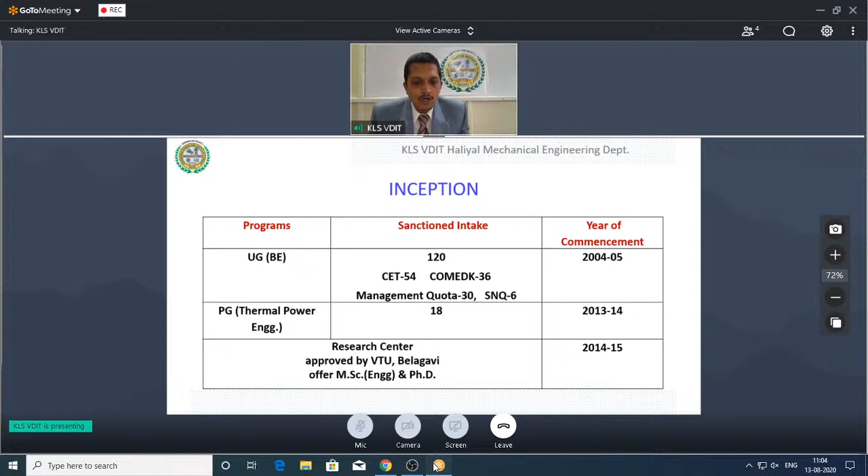Our Mechanical Engineering Department started in 2004 with an intake of 60, now it is 120. Out of this 120: CET 54, COMEDK 36, Management Quota 30, and SNQ 6. We also offer PG in Thermal Engineering with an intake of 18, started in 2013-14. Our department has a Research Center approved by VTU Belagavi, offering MSc Engineering and PhD.

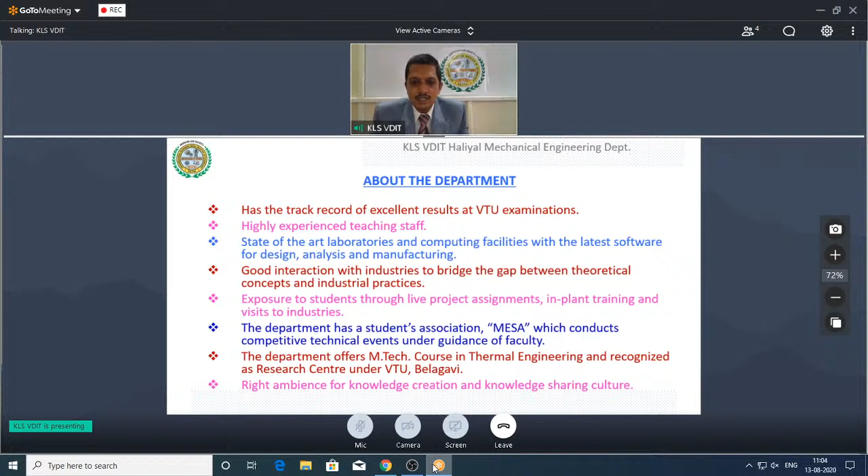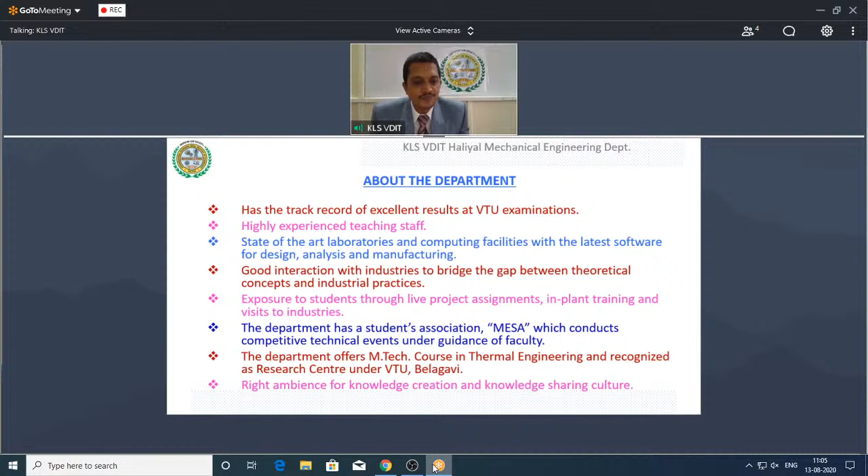Our department has a track record of excellent results at VTU examinations, highly experienced teaching staff, state-of-the-art laboratories and computing facilities with the latest software for design, analysis, and manufacturing. We have good interaction with industries to bridge the gap between theoretical concepts and industrial practices, with exposure to students through live project assignments, plant training, and industry visits. The department has a Student Association, MESA, which conducts competitive technical events under faculty guidance. We offer an MTech course in thermal engineering, recognized as a research center under VTU Belagavi, providing the right ambience for knowledge creation and sharing.

In our department there are totally 22 faculties, 2 are PhD holders, number of professors are 2, associate professors are 3, assistant professors are 17. Average age of faculty is 30 years, average teaching experience is 9.4 years, and the student-faculty ratio is 24:1.

Faculties cover all domains: thermal, design, and production. In thermal domain 36% of faculty, design 18%, and production 36%. Faculty credentials: 9% are PhD holders, 9% MTech holders, and 82% are pursuing PhD.

Journal publications in our department result from UG student project work, PG student project work, and research work. Journal publications in Scopus Indexed journals: national 45, international 65. Conference publications: national 24, international 43. Maximum citations in journals are 550, H-index 9, I10-index 9.

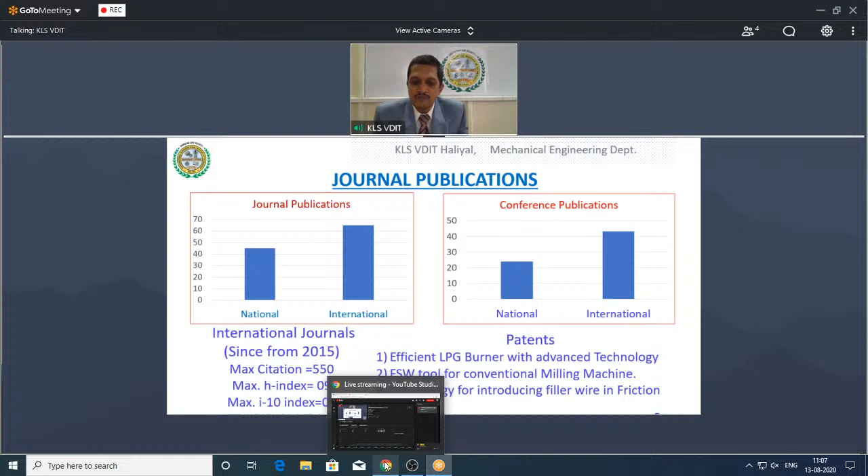Patents in our department include an efficient LPG burner, advanced technology friction stir welding tool for conventional milling machine, and technology for introducing filler wire in friction welding of non-ferrous alloys.

Faculty webinars, FDP, conferences, and seminars attended by our faculty members: webinars 80, FDP 60, conferences 23, seminars 18, and workshops 12.

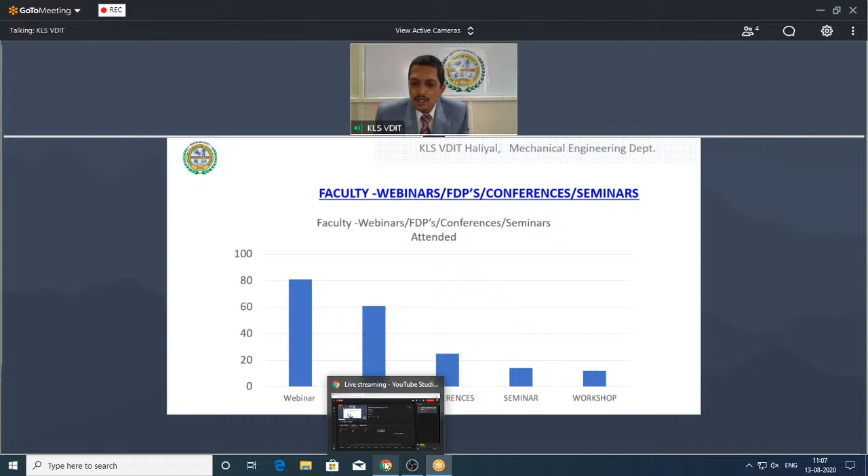Webinars and FDPs conducted during the lockdown period: Electrical Vehicle Modeling and Simulation with 180 participants; Connecting the Aspiring Engineers to their Dream Career in Challenging Situations with 100 participants; Mechatronics and System Design with 200 participants; Industrial Application of CAD, CAE, and CAM with 96 participants; and Industry-Oriented Engineering with 40 participants. Totally 5 webinars were conducted during the lockdown period, and 2 FDPs were conducted.

One FDP was on Online Learning Management System in association with IIT Bombay, with total participants of 2,150. Another FDP was on Weldability and Characterization of Non-Ferrous Alloys, with total participants of 114.

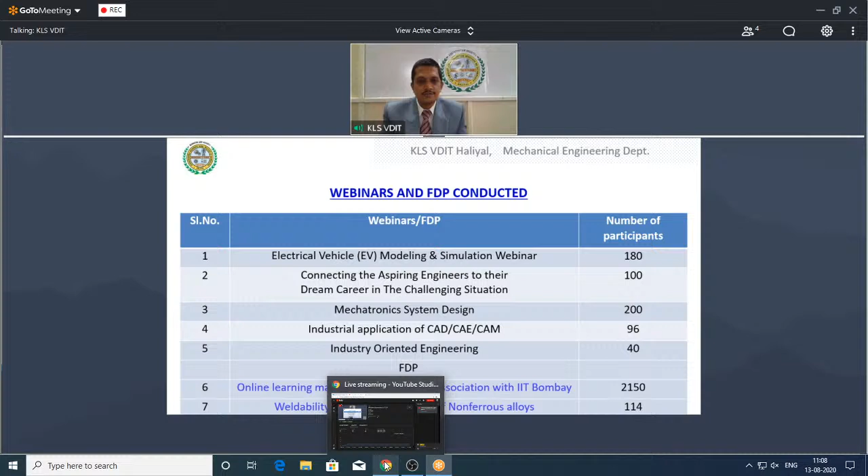Year of sanction is 2017.

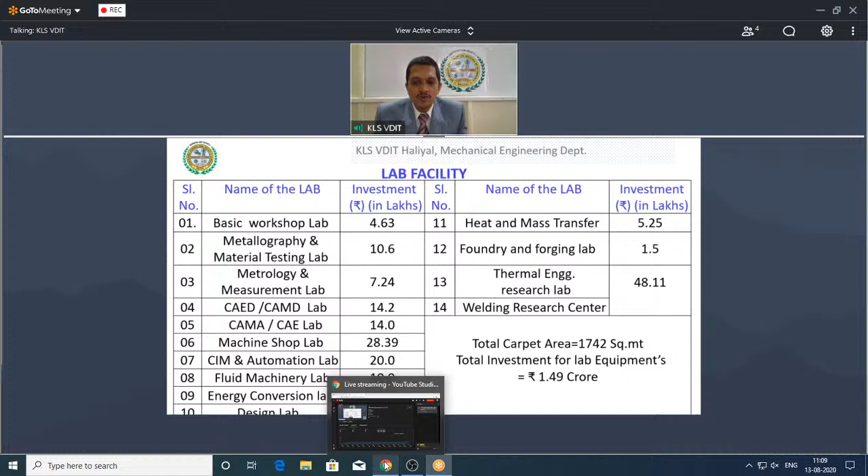Lab facility in our department: totally 12 labs for UG and 2 research labs for PG and research center. Total carpet area for the lab facility is 1,742 square meters. Total investment for the lab equipment is 1.49 crores.

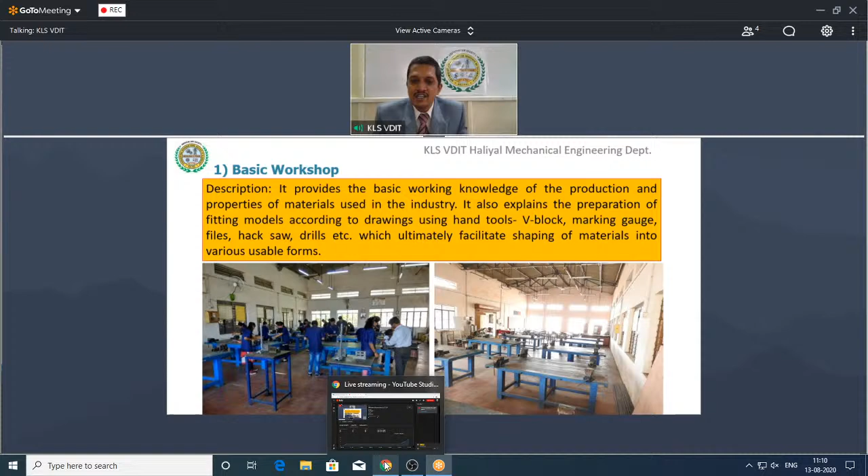The basic workshop lab provides basic knowledge of production and properties of materials used in the industry. It also explains the preparation of fitting models according to drawings using hand tools such as V-block, marking gauge, files, hacksaw, drill, etc., which ultimately facilitates shaping of materials into various usable forms.

Metallography and material testing lab provides the concept of preparation of samples to perform characterization such as microstructure, volume fraction of phases, and grain size, and gives knowledge of different failure modes and mechanical behavior of various engineering materials under different loads.

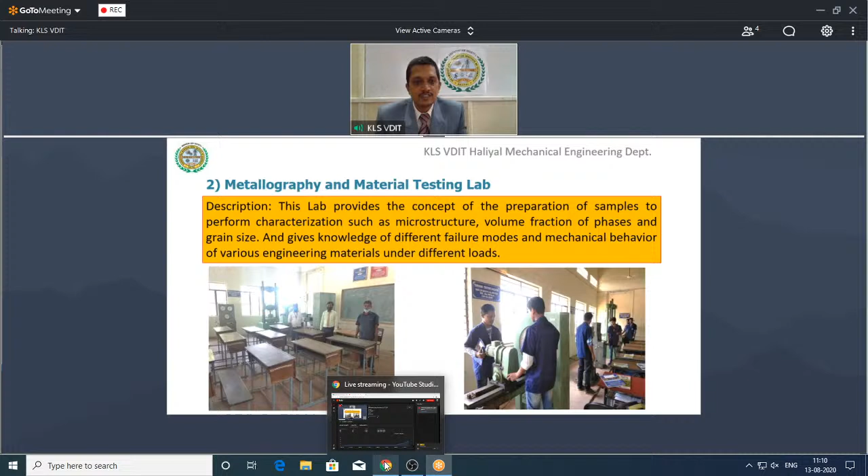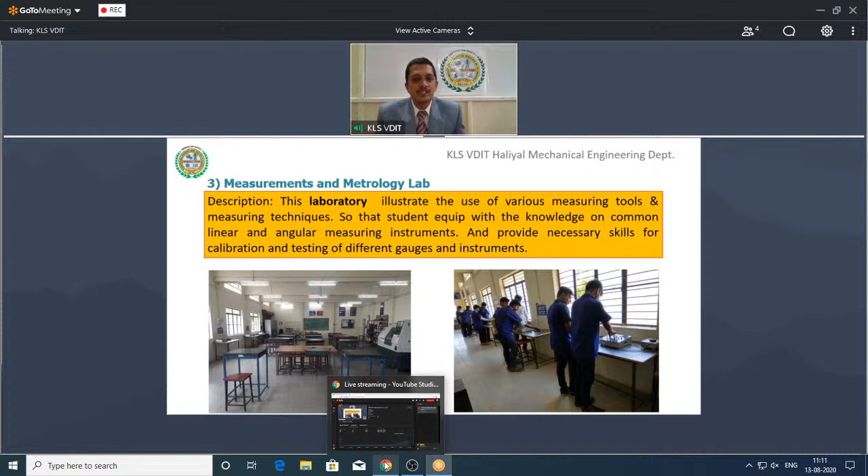Measurement and metrology lab illustrates the use of various measuring tools and measuring techniques so that students are equipped with knowledge on common linear and angular measuring instruments, and provides necessary skills for calibration and testing of different gauges and instruments.

Machine shop lab gives the knowledge of reading working drawings and operational symbols and executing machining operations, and provides the necessary skills for machining with appropriate selection of machine tools and machining parameters on lathe machine, milling machine, and shaping machine, etc.

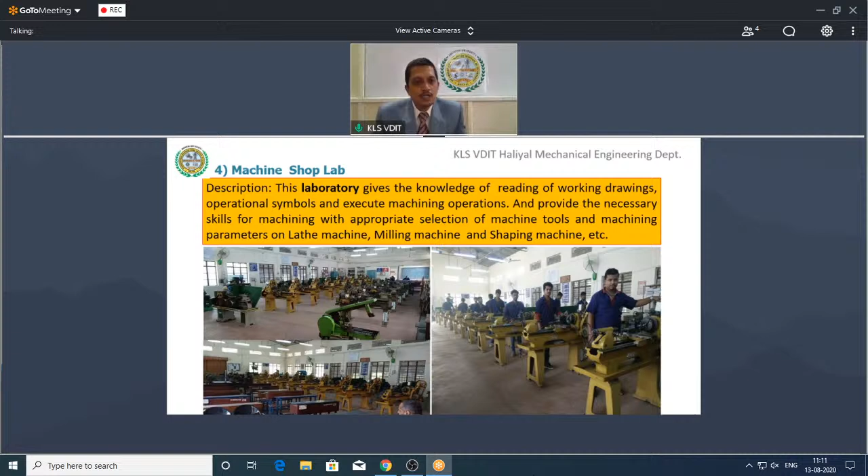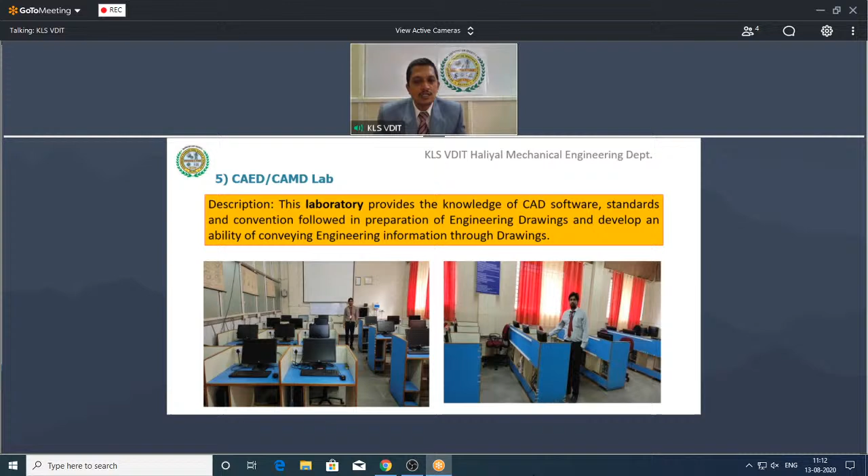Computer-aided engineering drawing and computer-aided machine drawing lab provides knowledge of CAD softwares such as Solid Edge and ANSYS, standards and conventions followed in preparation of engineering drawings, and develops an ability of conveying engineering information through drawings.

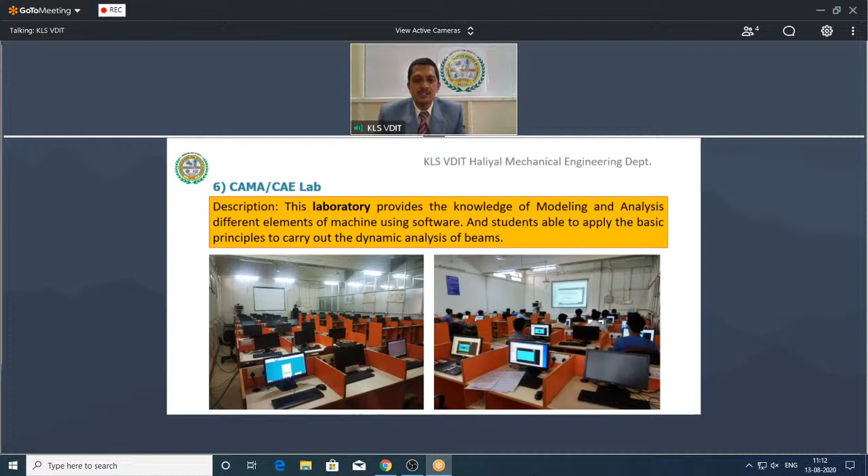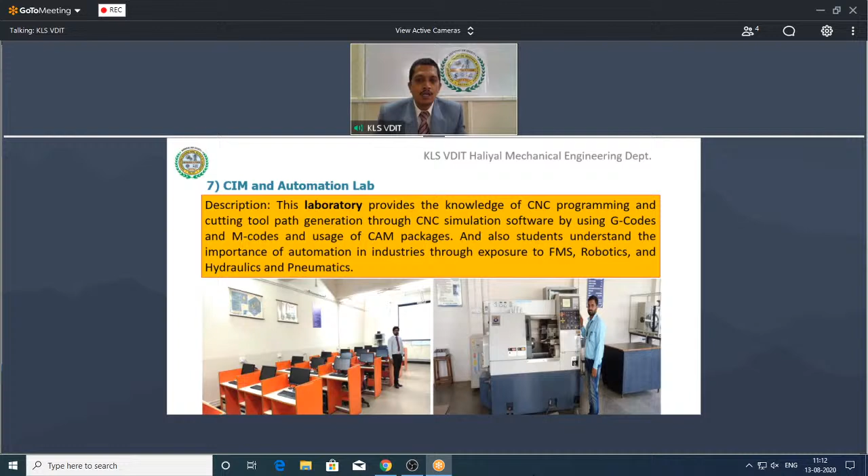Computer Integrated Manufacturing and Automation Lab provides the knowledge of CNC programming and cutting tool path generation through CNC simulation software using G codes and M codes and usage of CAM packages. Students also understand the importance of automation in industries through exposure to FMS, robotics, and hydraulics and pneumatics.

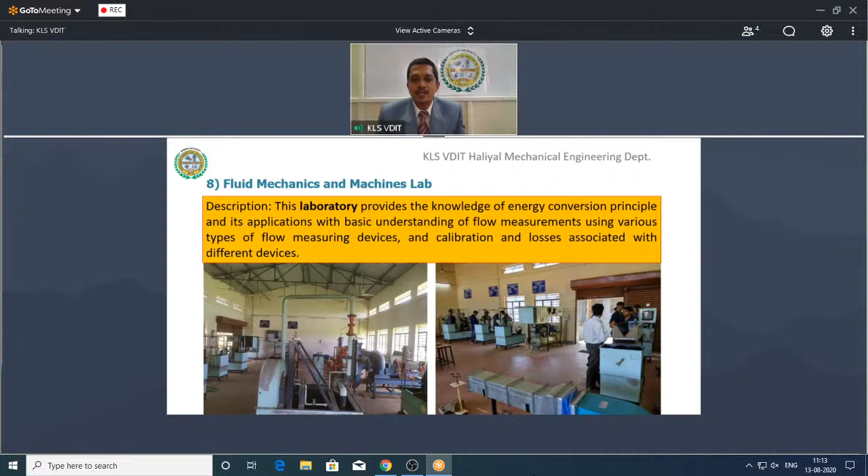Fluid Mechanics and Machines Lab provides the knowledge of energy conversion principle and its application with basic understanding of flow measurements using various types of flow measuring devices and calibration and losses associated with different devices.

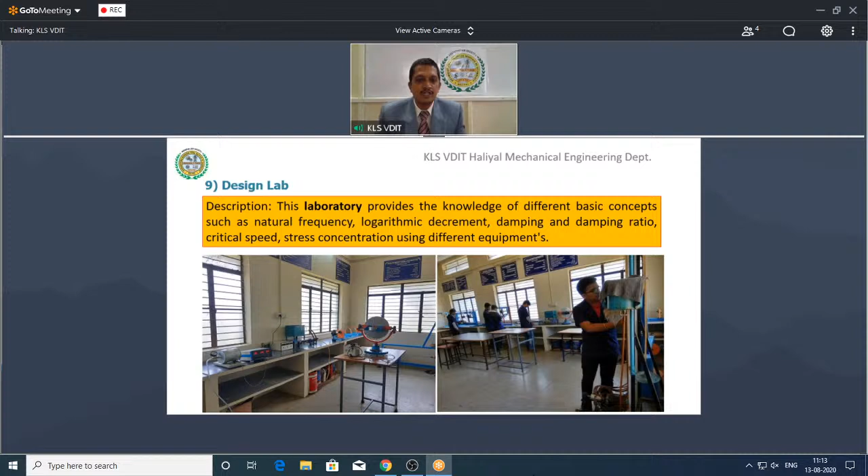Design Lab provides the knowledge of different basic concepts such as natural frequency, logarithmic decrement, damping ratio, critical speed, and stress concentration using different equipments.

Energy Conversion Lab provides the basics of fuel properties and its measurements using various types of measuring devices and illustrates energy conversion principle and performance analysis of IC engines using characteristic curves.

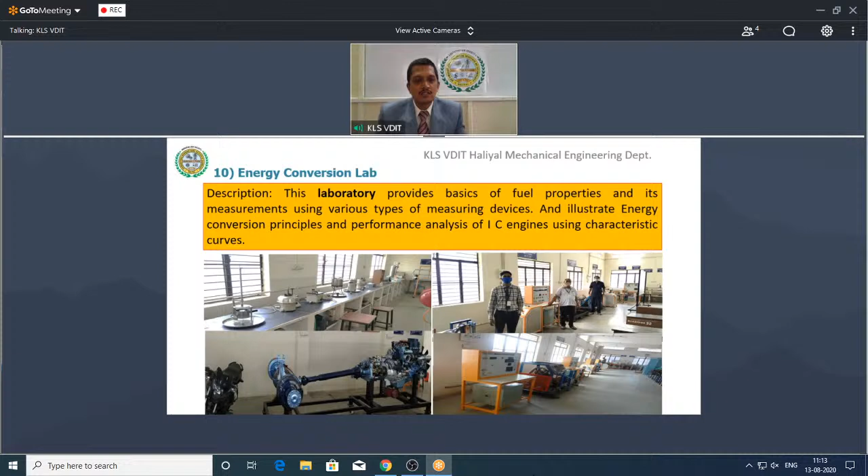Heat Transfer Lab provides the fundamental knowledge necessary to understand the behavior of thermal systems with experimental analysis and calculation of heat transfer through solids, fluids, and vacuum with applications.

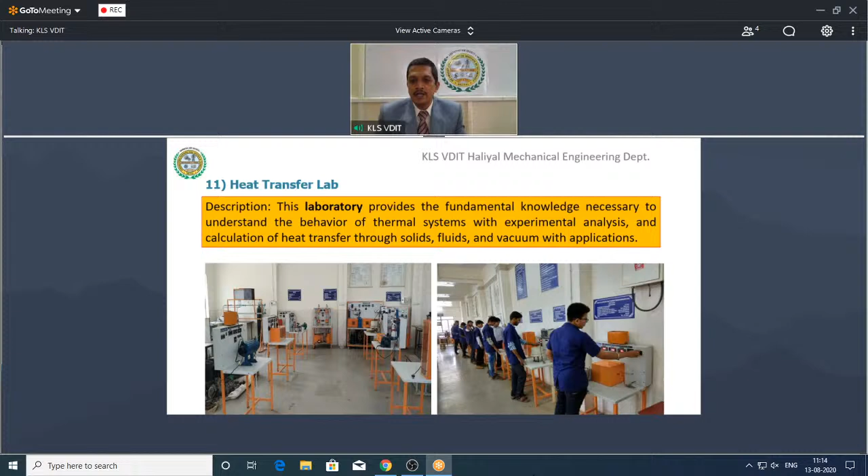Foundry and Forging Lab demonstrates various skills in preparation and conduction of various tests like tensile, shear, compression, permeability, clay content, and grain fineness number test as per industry standards, and provides training to enhance practical skills in forging and hand molding and preparation of models.

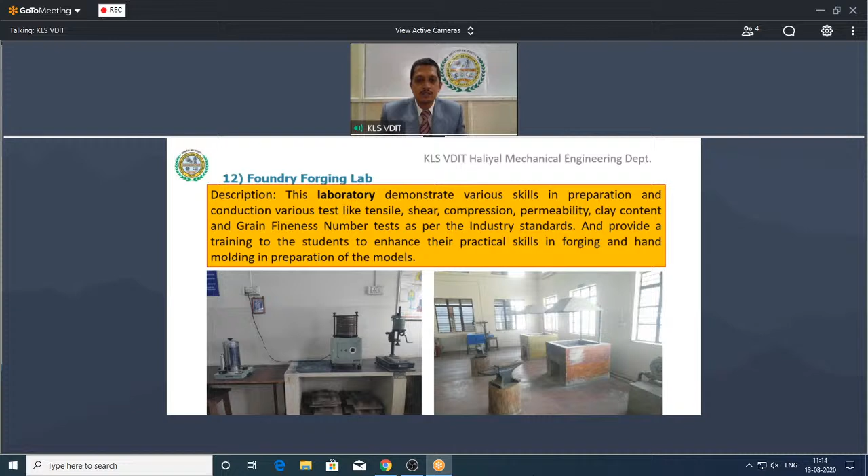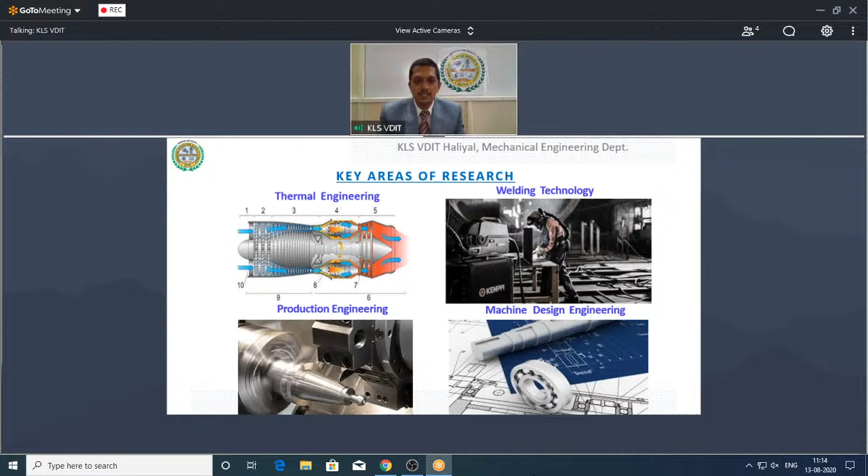In our department, key research areas are thermal engineering, welding technology, production engineering, and machine design engineering. For these key research areas, facilities in our department include thermal image camera, air screw compressor, regulating DC power supply, and experimental setup for jet impingement.

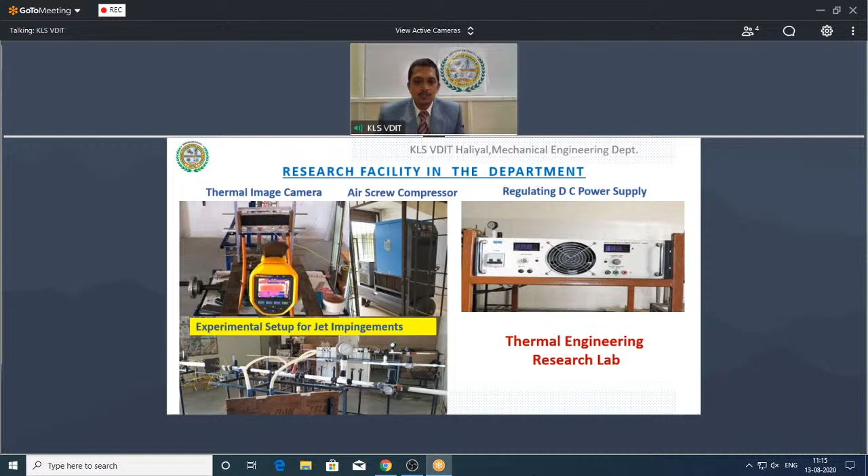In the thermal engineering research lab, mainly research is going on cooling of electronic devices through jet impingements.

Facilities for welding research in our department include metallurgical microscope, double disc polishing machine, universal testing machine, MIG welding machine, and micro hardness testing. All equipments are as per American Welding Society standards, and research is mainly going on development of filler wire in welding of aerospace alloys.

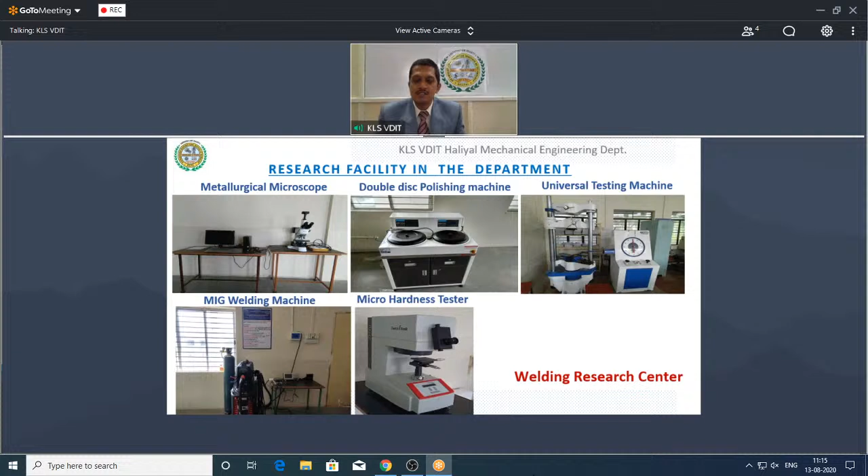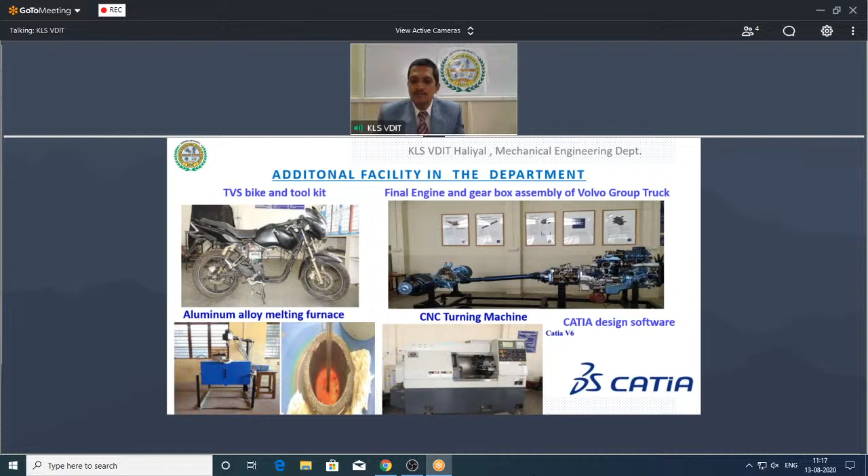CNC machine, CNC turning machine, is mainly used to turn various components related to automobile parts. CATIA design software is mainly used in designing machine elements through the software.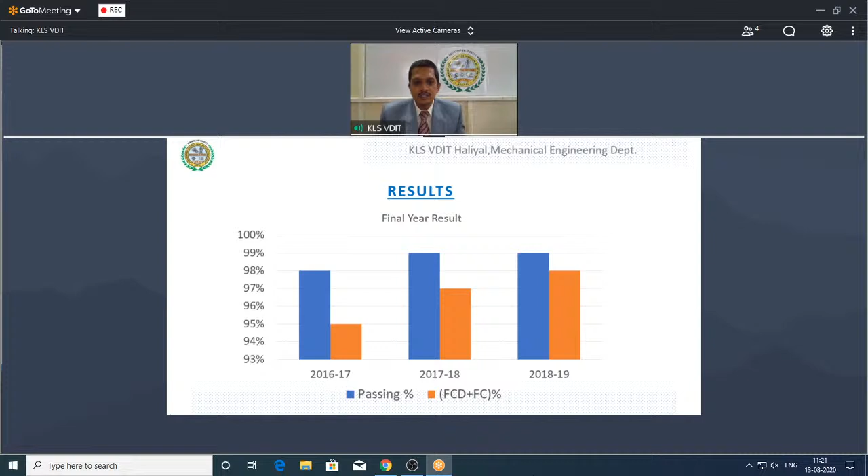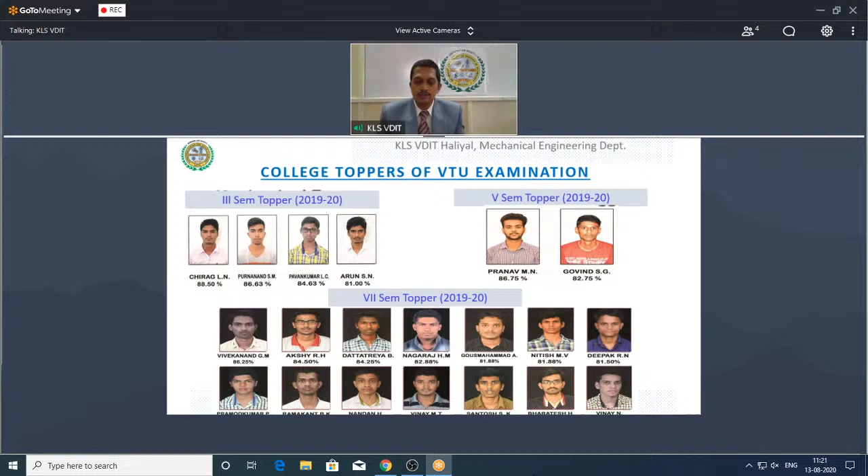Student achievements in our department: our students got the Best Project Award by KSCST in the years 2016, 2017, and 2018, and the result for 2019-20 is awaited.

Our department alumni Mr. Ramangowda Patil secured 3rd rank in VTU in 2017-18, Mr. Maruti Bhovi got VTU blue for 2016-17 in wrestling, and Mr. Shahrukh Khan got VTU blue for 2016-17 in netball.

Our institute student secured 2nd place in a netball tournament in 2018, and was VTU state level winner in handball tournament in 2018.

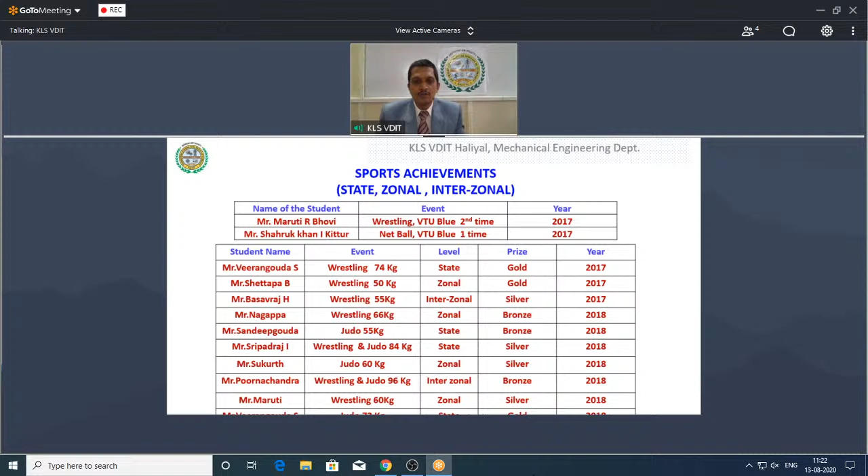These are sports achievements from our departmental students at state level, zonal level, and interzonal level.

Average salary of campus selected students is 3.5 lakh per annum.

Our department has MOUs with industries like Bharat Forge Limited Pune, West Coast Paper Mill Limited Dandeli, Shantala Power Hubli, Tata Technology Pune, HESCOM Hubli, and TVS Motors.

These are photographic views of MOUs with industry: Shantala Powers Hubli, TVS Motors, HESCOM Hubli, and our institute's MOU with Sandbox for startups.

List of industries for internship and project in our department, about 28 surrounding our Hubli region.

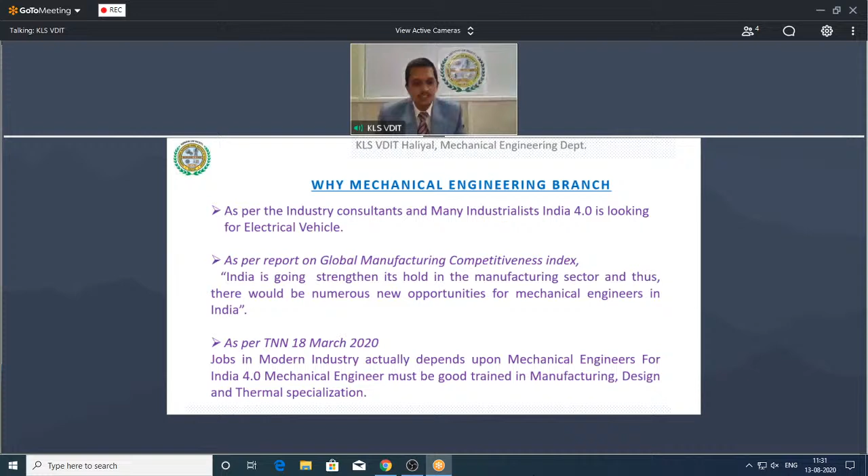For India 4.0, a mechanical engineer must be well trained in manufacturing, design, and thermal specialization, and this is achieved through mechanical engineering at KLS VDIT.

As observed in the previous slide, India 4.0 is looking for electrical vehicles. When you convert electrical energy into mechanical energy, there is generation of a lot of heat. The requirement is for a device that can throw off heat in a short period of time. Our thermal engineering research department is working exactly on this and coming out with solutions.

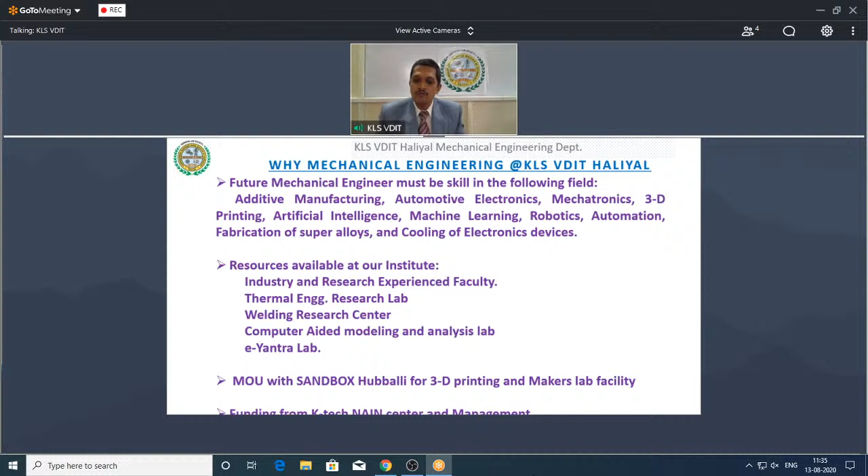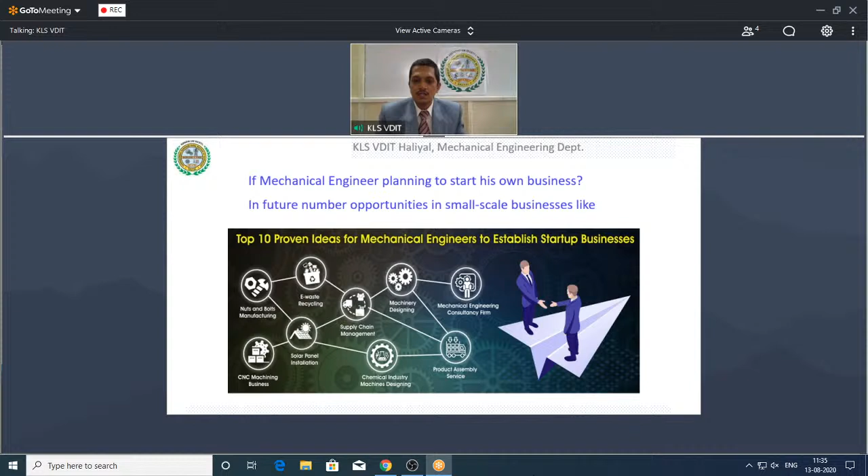If a mechanical engineer is planning to start his own business, there are numerous opportunities in small scale business in the future, like nuts and bolt manufacturing, CNC machining business, e-waste recycling, solar panel installation, supply chain management, chemical industry machines designing, product assembly services, machinery designing, and mechanical engineering consultancy.

At the end of the mechanical engineering course, graduates are skilled in problem solving, creativity, communication and leadership skills, teamwork skills, math and computer skills, and project management skills.

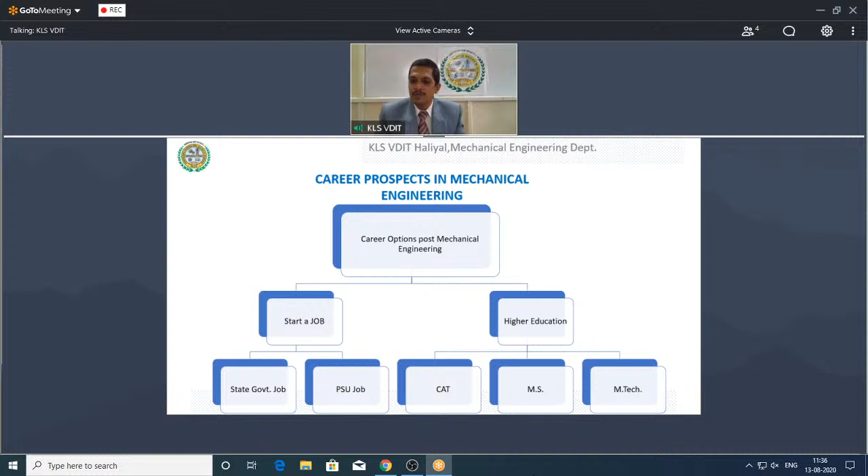Career prospects in mechanical engineering include starting a job in state government and public sector units, and one can also go for higher education through CAT, pursuing MS and MTech courses.

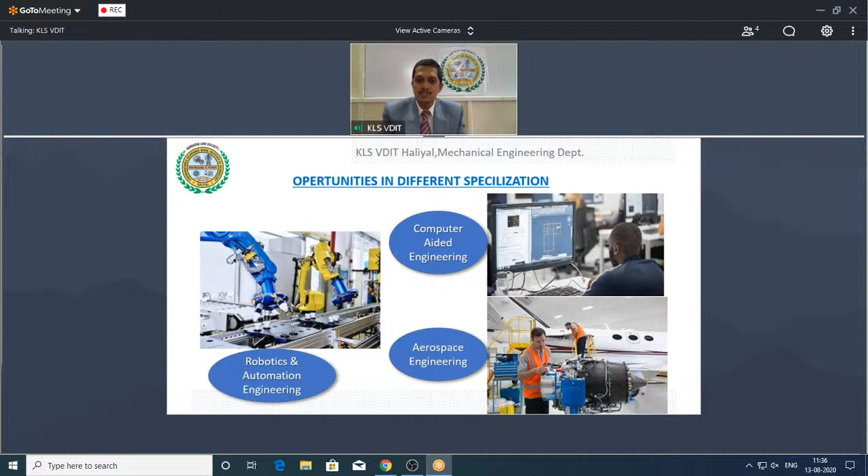There are opportunities in different specializations such as machine design engineering, production engineering, thermal power engineering, robotics and automation engineering, computer-aided engineering and aerospace engineering, automobile engineering, and production management.

Join mechanical engineering, KLS VDIT.